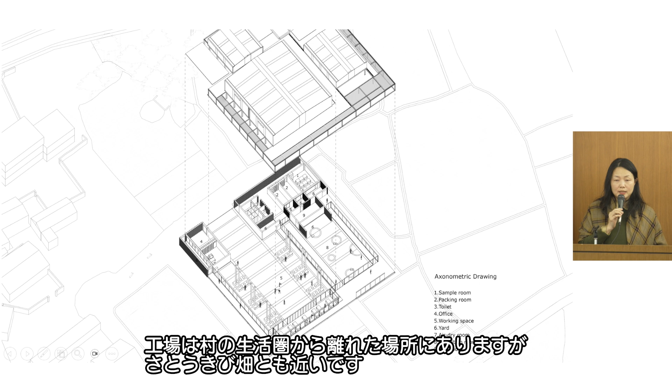Of course, there are also fire risks and hygiene issues, and interruption to village daily life. So a new factory is programmed away from the living parts of the village, but connected to the sugarcane fields, integrating not only the production space but also community programs and other functions.

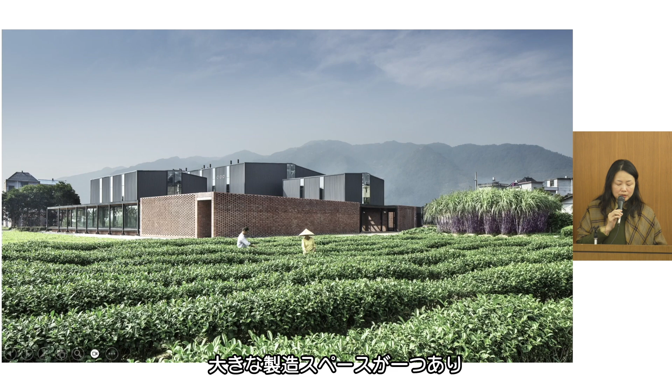The main production space is one large space, divided by different family workshops based on their working stations and system of work. You can see the structure, order, and rhythm of the space, with working stations and chimneys all placed in order. The building is conceived as a central stage to accommodate the production as a live performance.

These cooking masters dress in bright colors, like actors playing on a stage with their body movements. Together with the temperature and the heat, it's quite a performance running 24 hours a day during the production season, with the 3 different shifts.

And you can see that even the lighting is also designed as stage lighting to illustrate this production scene as a live performance. So in this sense, the factory is not just for production, but also considered a live museum to showcase this intangible cultural heritage of brown sugar making as a cultural platform, a cultural museum.

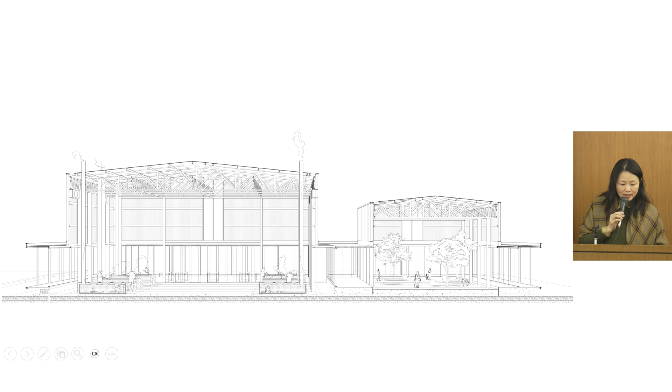And the space again accommodates other community program activities and functions, also open to visitors. The whole space is designed as open, transparent space, so the stage is always seen from different sides, different perspectives. At the same time, the community space is open, partially covered but completely open to nature, to the landscape, and on the other side is looking into the production area.

So these spaces are not only used for the factory, because this production, due to the agricultural rhythm, only happens in the winter season. During the non-production season, the space can also be used for village cultural events, or this puppet show theater group in the village, performed by villagers. So at the same time, this production factory can also function as a community center.

With this Huimin Tea workshop, we wanted to explore further cultural messages, especially with tea making, which is always related to Taoism, to Zen spirit. This is a tea factory located in the tea plantation in Zimu Mountain.

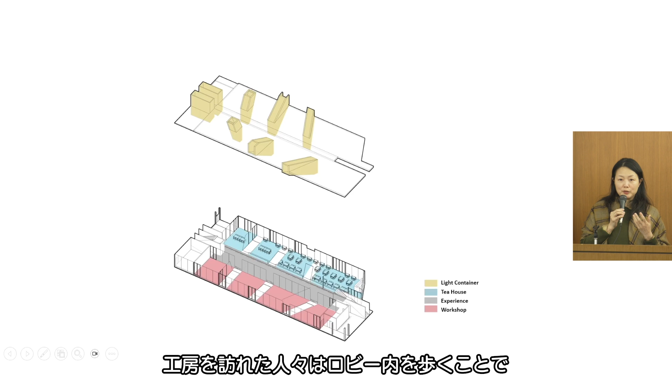The community here are She minority people who have been living in this mountain and producing tea since the Tang Dynasty. So the building volume is a simple box sitting on part of the flatland on the terrace, with one side as production space and the other side as tea tasting, for tea ceremony, tea tasting as a leisure program. At the center is the visitors' lounge that you can walk through to visit, to view, to observe the production space.

So that's basically the volume sitting on our site as a continuation of the tea terrace, tea plantation. On one side is the tea tasting, tea ceremony space looking out to the landscape. The other side, facing west, is the space hidden behind this perforated wall, which acts as a sunscreen for the production area. This is the traditional way of making tea in the local region since the Tang Dynasty.

Because of the local village culture, the She minority people have a spoken language but no written text, so instead they use pictographs. Here we wanted to transform the pictographs of the She minority people into symbols used on the perforated wall blocks.

Here you can see the precast blocks indicating different activities at different altitudes. From the top is the sun, from the bottom is the land, and in between is human activity, showing how the She minority people work and live on this land in this mountain.

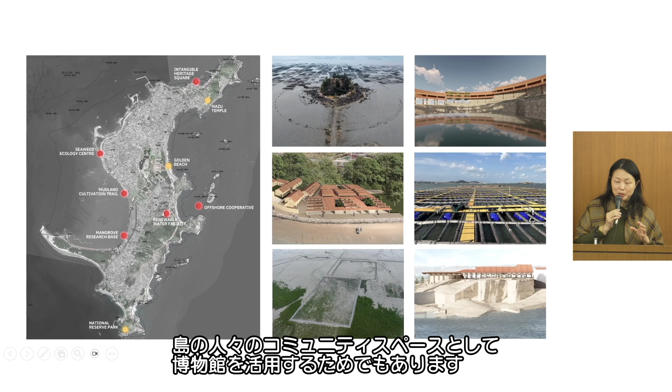So these small intervention spaces, similar to what we have done in Songyang, would become a life museum showcasing local life and production. But at the same time, the space works not only for visitors, but can also become community space. More importantly, it restores the local cultural production identity.

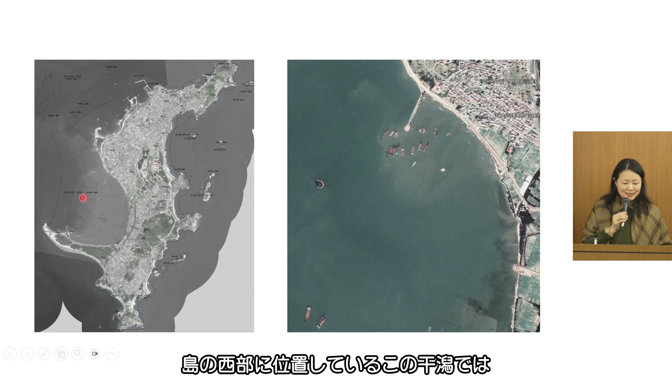This project in the mudland is located in the west part of the island, where every 6 hours there's a high tide, and every 6 hours there's also a low tide, similar to Mont Saint-Michel in France.

When the tide goes off, it reveals this magnificent ocean farming happening on the mudland, where fishermen have been cultivating for the past 1,000 years of history by using masonry sticks in the mudland.

During the low tide, oysters gather on these masonry sticks, which becomes the subject, the element, that fishermen collect after and during the low tide.

This becomes an inspiration, not only for its scenic view, but also for this indigenous knowledge and wisdom of how fishermen live by using this rhythm from nature, and with such minimal intervention, can still make a living, can make their income out of nature.

This inspires us to take the whole space, the whole production, the whole system as an existing architecture. Think about the space with the low tide: it opens up the mudland for people to walk upon this land. And when the tide comes, it's inaccessible for human beings. So there's already a space, even an architecture, formulated by nature itself.

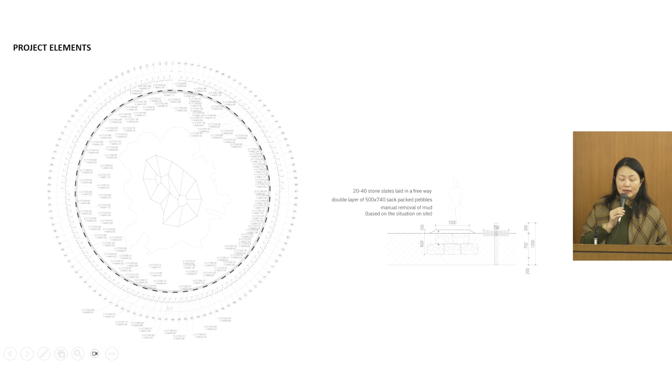In this case, our design intervention considers this system as an existing architecture, and we only introduce a circular walkway along it to integrate with this system by using recycled elements from this production. This reveals a whole body of knowledge, a whole site of aquaculture on the mudland with very specific local indigenous knowledge, experience, and wisdom.

Our intervention is only to introduce a walkway for visitors, to make it not only a sightseeing trail, but really to take the whole system as a learning platform to understand this traditional way of living and producing by the fishermen, by the village community.

This is the high tide, and you could barely see the production. But when the tide goes off, it really reveals such a scale of production.

The idea is looking into the production of how people have been inventing in different parts, either in mountain or on the island, based on their local ecosystem and geographical conditions. It's always low-tech, but at the same time sustainable knowledge and techniques, how people can survive on this land for hundreds or thousands of years. This is the knowledge, the educational resource for our society to understand such a sustainable way to coexist and co-produce with nature itself.

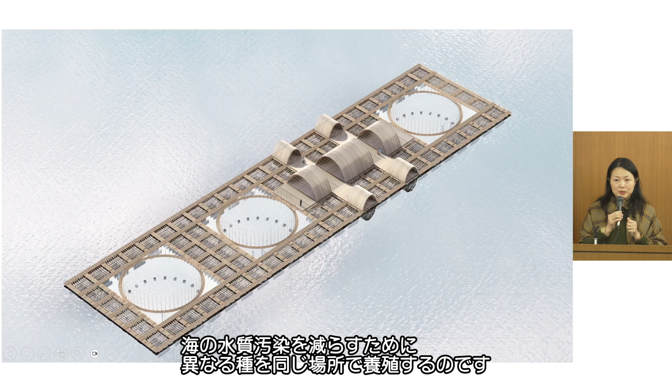Different kinds of aquaculture have different interruptions to the ocean water. Maybe the fish can produce pollution, but the kelp and abalone can help clean up this kind of pollution. So on top of these different elements, we designed a system that can bring all these different cultivations together to reduce the pollution or interruption to the ocean water, which kelp, oyster, and abalone can help absorb the inorganic carbon in the ocean water.

At the same time, we also wanted to take this as a learning or research platform for young students from the universities in the region. So by adding an additional canopy, this will become a platform for education, for learning, and for research as well.

This structure itself brings up another discussion of how we see space, whether space is only built on top of the ground, or the ground can be the water body itself, and utilizing the resource or space underneath the water can also be considered as architecture. So it's work in progress.

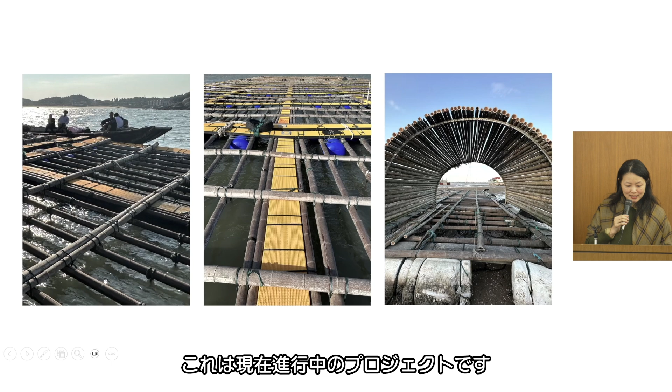We also had a seaweed ecological center. Seaweed production is also very popular in Japan, in my home city, along the coastal areas. It's a very popular production by local fishermen.

Here I want to talk about seaweed production on the coastal line, on the mudland, which is a really beautiful production structure. I want to talk about this seaweed incubator that we were led to by local fishermen we met on the beach, who showed us this seaweed incubator. It's a workshop for baby seaweed seeds to incubate, attached to oyster shells and soaked in the ocean water for 8 to 10 months in a year before being transported to the mudland for growth.

This is another inspiration or starting point for this seaweed ecological space, where we want to take this incubator as a central space.

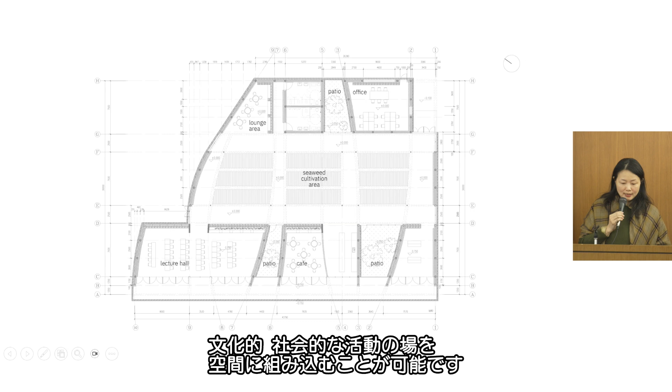Again, this is a factory, a workshop for production. But the cultural and social program can also be integrated with this production space. On one side it looks to the ocean, and on the other side it connects with the community. In the center of the building is this incubator for baby seaweed growing silently underneath the ocean water.

The roof is monitored with light through different growing seasons. But the rest of the space can also become workspace, workshop for the community, for villagers, or just a gathering space for both villagers and visitors. Again, this production building itself is based on top of local existing indigenous knowledge, but integrates our social, cultural, and educational program together with the production function.

We also worked with unusual resources. Today I want to talk about the Jinyun Quarry that we were invited to by Jinyun County, the neighbor county of Songyang. But unlike Songyang, which has a rich cultural and agricultural history and heritage, Jinyun County, because of its geographical characteristics, has quarrying as the main production in the region, which started over 1,000 years ago.

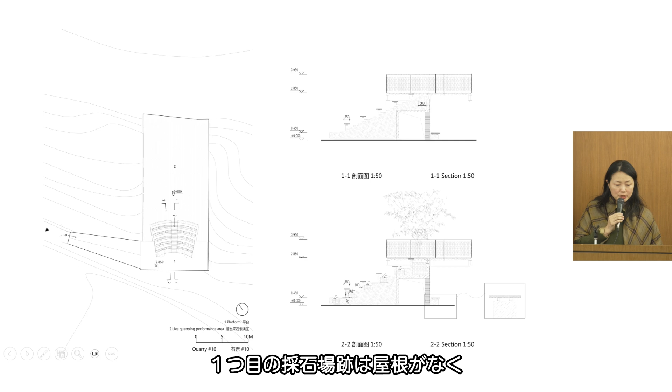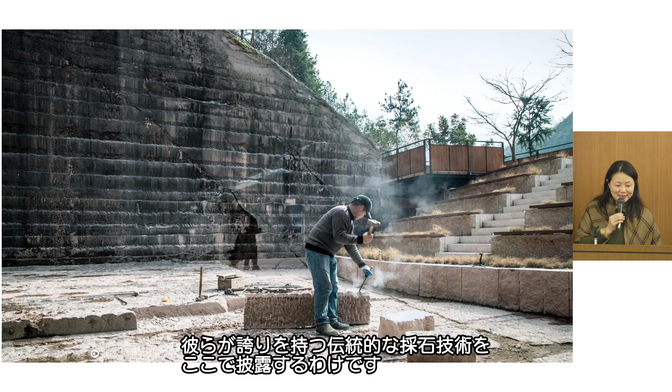The first quarry space is an open quarry. The function was actually requested by the quarry workers, as a demonstration site to show their quarrying techniques as a heritage—something they're really proud of. Alongside is the terrace, or seating area, for visitors, also serving as the first resting area at the arrival point.

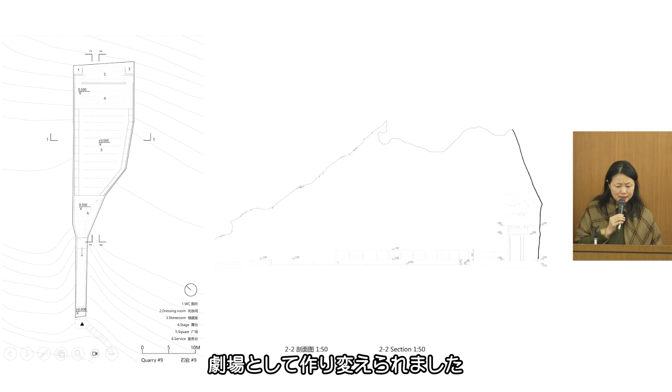The second one, based on its acoustical quality, is transformed into a performance space, either for young villagers or for local traditional opera performances. Again, the design uses minimal intervention, only to ensure safety and acoustical quality, while providing a layer for new social function and program.

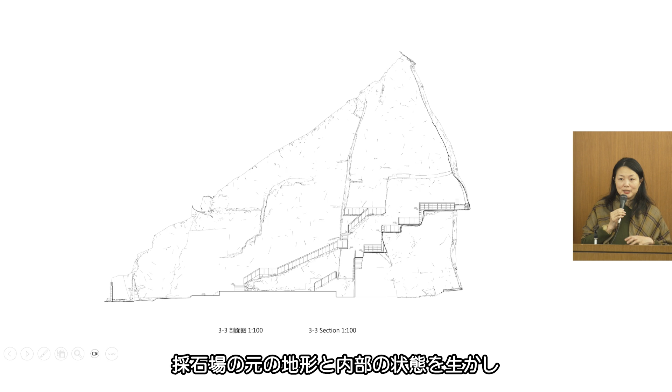The third quarry is dedicated to local cultural, literati, and calligraphy heritage, converting this quarry into a book mountain. It takes the original topography and interior condition of the quarry space and turns it into a book mountain as a public, community program.

The design really just follows the original interior topography and conditions. By the time the quarry was closed down around year 2000, it was actually domestic in scale, in contrast to the massive scale of this quarry space, which reaches 38 meters at its maximum height. This new indication of domestic scale serves as a guide for new kinds of social activities, introducing a walkway, terrace, or stopping platforms for visitors.

So these quarry spaces are not just functional spaces—they used to be abandoned spaces from closed-down production or operation, and now can be transformed into cultural community spaces. More importantly for us, these quarry spaces serve as monuments for the quarry workers, the quarry community, and the quarry heritage in the region.

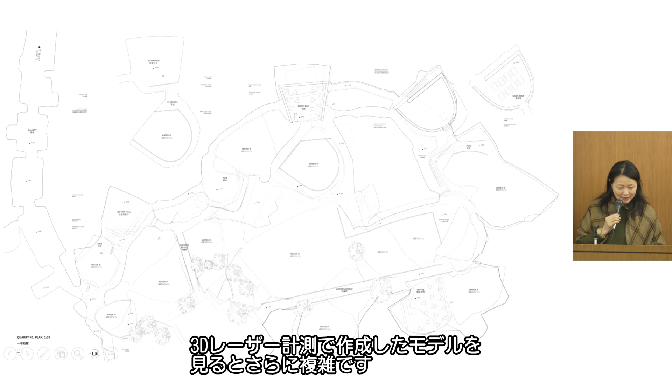This brings a new kind of challenge, not only because of the complication and complexity of the quarry itself—if you look at the plan, you already see this very organic form, and it's only one level of plan—but this is really the model we produced after 3D laser scanning of the space.

We could see the tallest space from ground above is 70 meters, and from ground below it could reach over 20 meters into the cave space underneath. This is really the challenge of complexity for such an engineering project. But at the same time, we wanted to take this project as an opportunity to discuss whether such a complex quarry space could be reused for urban functions and accommodate urban scale.

In that sense, you could see from this construction space that even with interior space of over 20,000 square meters and such a magnificent height below and above ground, the space has very small openings, which doesn't allow modern machinery to be shipped inside to operate. This gives us constraints but also inspiration that with minimal design intervention, we should reduce the amount of design itself, only providing design with necessity.

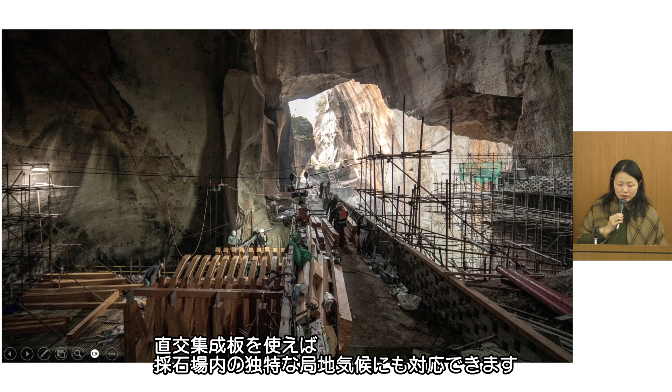So we also looked into how to proceed with construction in a possible way. On one hand, the design is minimal. And we're also looking into prefabbed CLT materials to accommodate the very unconventional microclimate within the quarry itself.

From the entrance, the design started with a walkway to enter the space. This walkway is connected and supported by two bridges using CLT timber structure, first as a cultural message referencing our traditional long bridge, which I showed earlier. It's also prefabbed CLT elements that can be produced in a factory and shipped easily into our construction site, and the CLT material can adapt to the microclimate within the quarry space.

When you enter the space, you discover on one side a cafe space as the arriving landing area. Besides the circulation, we asked our lighting designer to illuminate large figures on the cave - it's the mineral, like copper and iron components within the stone itself, revealed by the quarry workers through extraction. These become large-scale figurative paintings, artwork created by nature and the quarry workers together, becoming indications of how to proceed through the space.

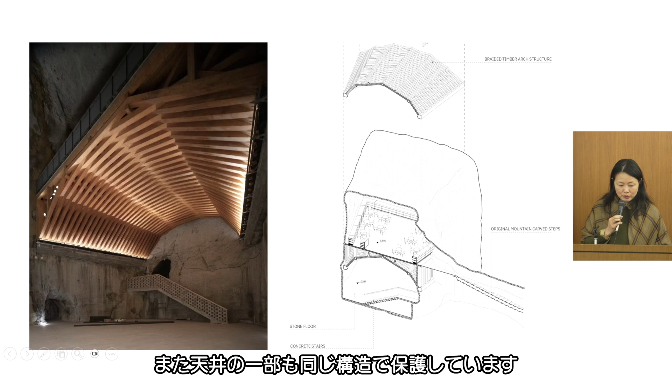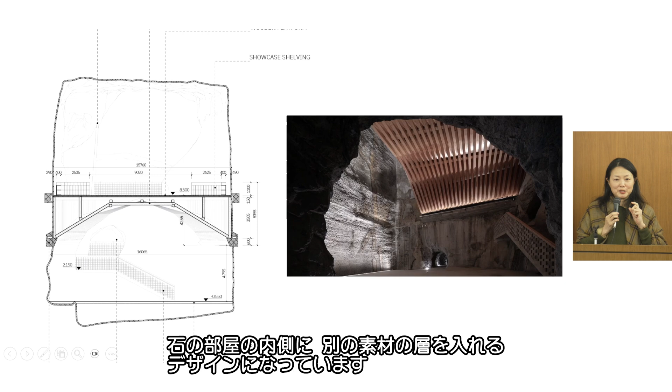Whenever there's a landing platform, we were able to accommodate different functions like a cafe, workshops, designer workshops, or educational platforms. Some of the new platforms, with new floors, are supported again by this timber bridge structure, which extends to an architectural scale and also becomes the ceiling to shelter the space below. For all the quarry spaces, the design intends to introduce a new layer of material and scale for human activities.

This can be used as a theater space for operas and theaters. Another resource within this quarry is water, which creates a water passage - the cave underneath the ground can reach over 20 meters deep. You can see this layer of safety net underneath the water, but it also creates a passage for a different kind of experience when visiting this quarry by boat.

The smaller tunnels can be used for art exhibitions - there's currently a show going on within the space. With the tunnels leading to open quarry space, it's also transformed into courtyard spaces. This quarry just opened up one month ago, and we're still looking forward to seeing how it will accommodate to its urban life in the future.